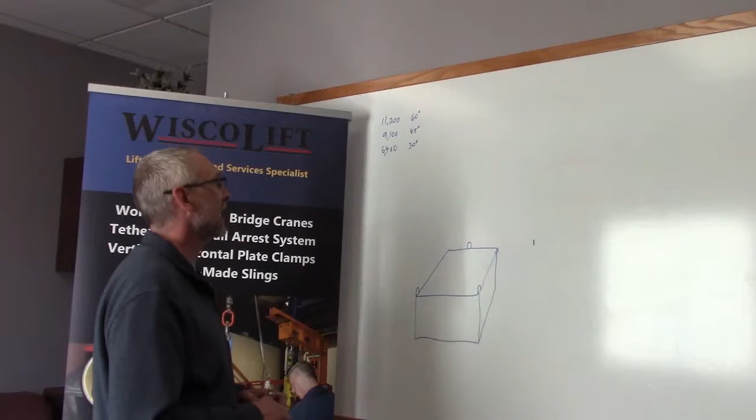I'm continuing a series on chain slings, and I'm doing the third part of part 2 of chain slings and capacities versus their hitches and angles. And right now I'm going to be talking about 3-leg and 4-leg chain slings. To keep in mind, 3-leg and 4-leg chain slings have the same capacity. You only gain stability with the 4th leg.

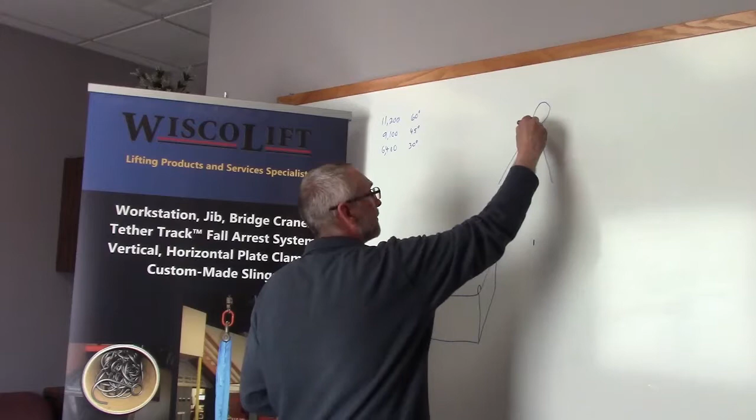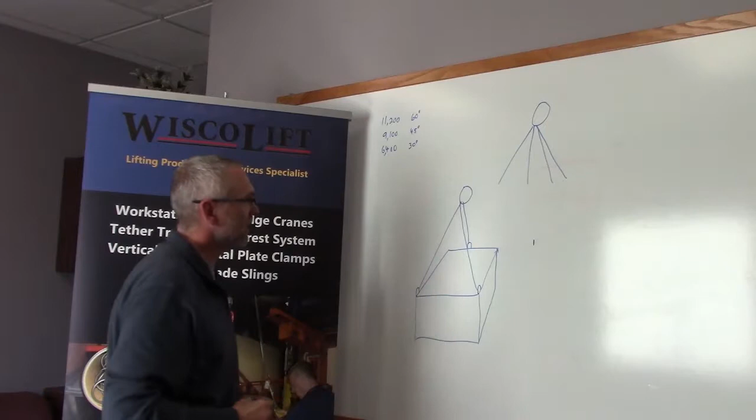So if you imagine you have a 3-leg chain sling or a 4-leg chain sling, all have the same capacity. The 4th leg adds stability. So if we're going to pick up this load right here with a 9/32 chain sling, and we have our 3 legs coming down, that is a 3-legged chain sling. Your capacity is 11,200 pounds at 60 degrees. You have the same capacity if you were using a 4th leg.

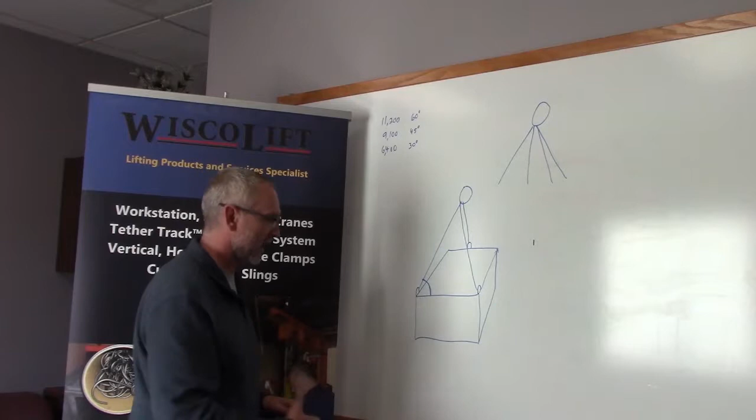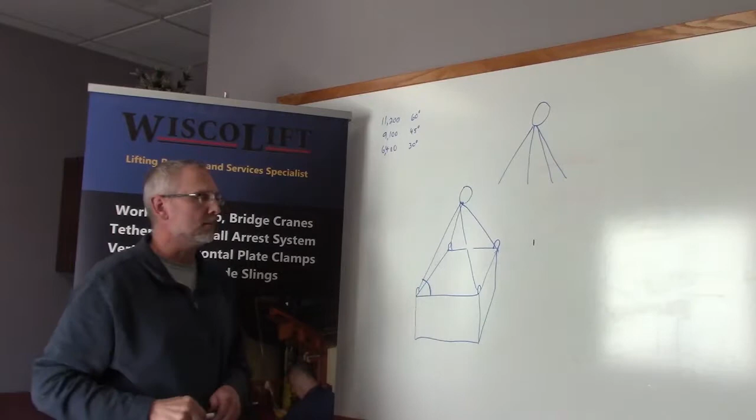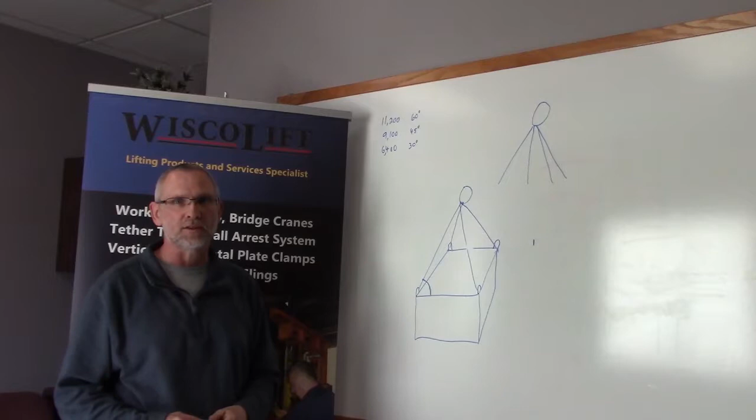So if we, instead of having a center pick point here, we had lugs in the corner and you had 4 legs coming down, picking up that same load, you have the same capacity. All you've done is you've added stability. And the theory behind that is at any given time when using a 4-legged chain sling, only 3 legs are actually holding the load. And as the load is moving and shifting, only 3 legs are holding and 1 leg might go slack.

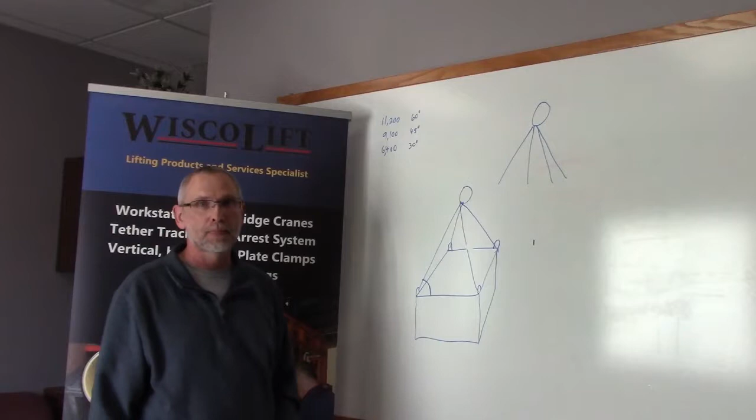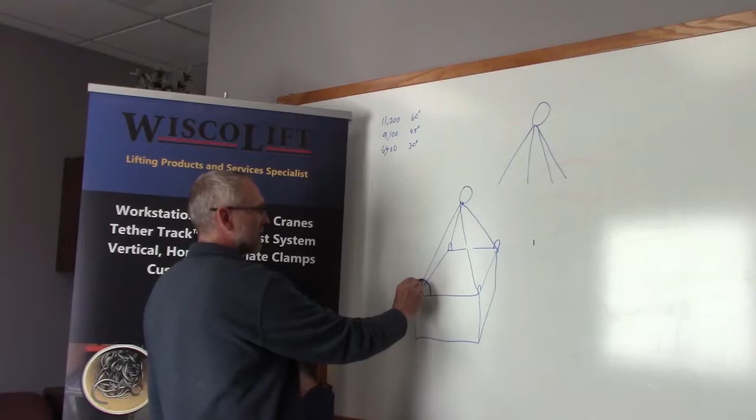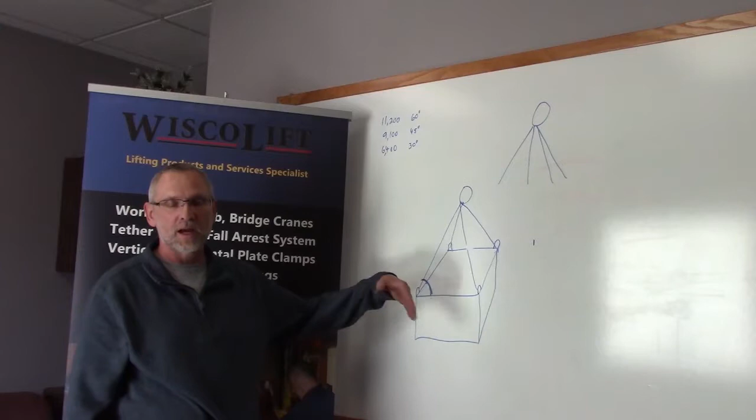So your working load limits, if this angle becomes tighter, if let's say the load gets bigger and wider, then your chain sling comes down and you end up with a tighter angle here, your load to sling angle, down to 45 degrees, then your working load limit is only 9,100 pounds. If this gets down to 30 degrees, you basically have doubled the stress on the sling, and now your working load limit is only 6,400 pounds.

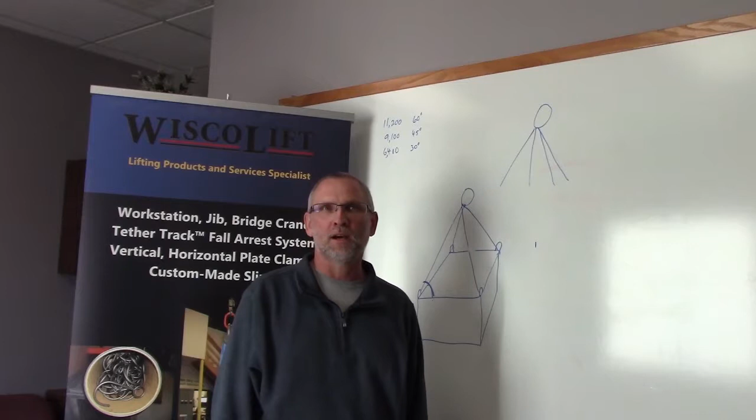So that completes our series on chain slings, chain sling assembly, and the different types of hardware that goes with them. And then we did the effects of angles versus the working load limit, and the hitches versus working load limit.